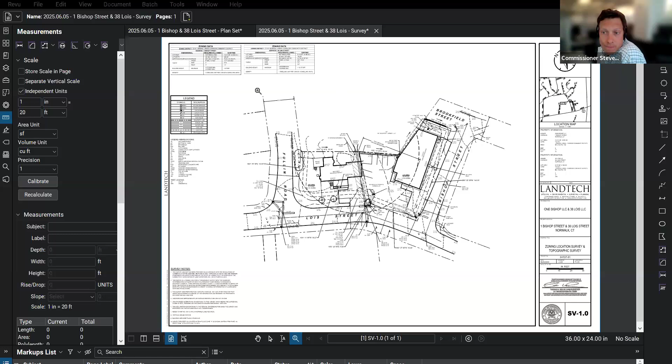Andy, can you zoom in a little bit please? Sure. Beautiful, thank you. So again, this was the commercial building that currently exists today, and this is that parking lot. This is a single family dwelling and the parking lot driveway here to access the garage.

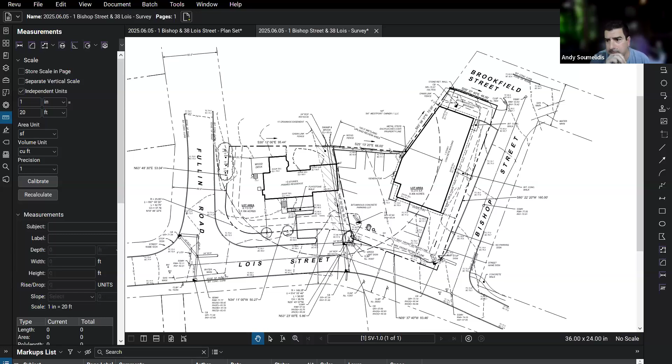Under proposed conditions, we're looking to put a new building in the general vicinity of that existing building on 1 Bishop.

This single family will be torn down also, and a new 4 townhouse residential structure would go in the vicinity of 38 Lois. These curb cuts get totally eliminated.

So right now you would enter the site here for this commercial lot and here for the residential lot. We would come in now off of Fullin Road here and access. These are garage bays underneath these townhouses. So you would get under these townhouses coming off of Fullin Road, and then you would continue on through here.

And there's additional parking underneath this building. You'll see that in the architectural a little bit later on. And there's some handicap and guest parking here as well. You'll see also from the landscape architect's plan, there are a few areas of pervious asphalt as well.

Just for the record, we didn't take that into account when designing our drainage. A lot of times we take pervious asphalt, put that into our drainage calculations, and remove that area from our underground detention systems or any type of treatment system. So that is above and beyond, not even part of our application or part of our drainage infrastructure taking credit for it.

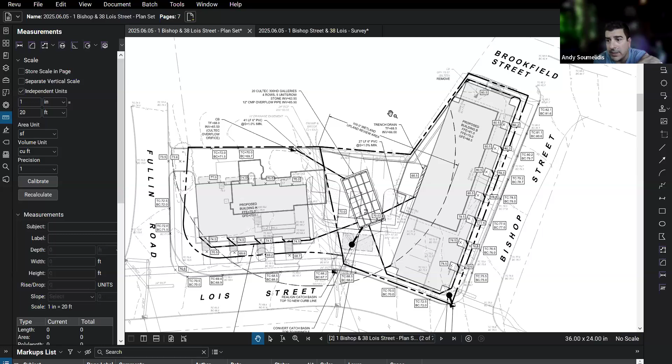Correct. Do we know the extent of the wetlands beyond the property line? So for example, if there were wetlands — well, I'll just leave it at that. So that arc might not accurately represent the extent of the upland review area, correct? So we did not, we did not flag off-site wetlands.

We typically don't flag off-site wetlands in any instance, only what's on our property. What we can put on here perhaps is the town's wetland line, which is very similar to where the limits of the brook are. I don't think it extends much on here, it might extend a little bit more into here, but it's not substantial enough to change the impacts of that 100-foot buffer. Got it, thanks.

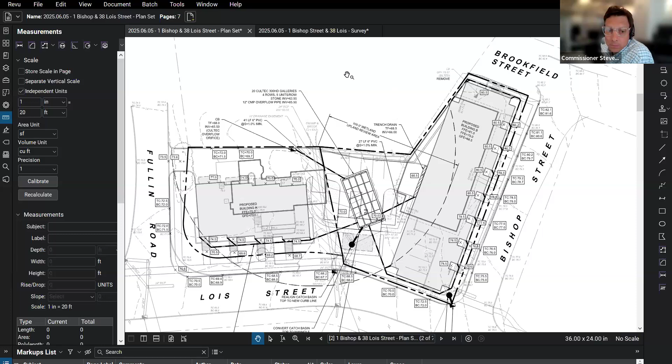We can email you the previously delineated wetland on that adjacent property. Oh, you have that. Perfect. We do from the Pepperidge Farm subdivision.

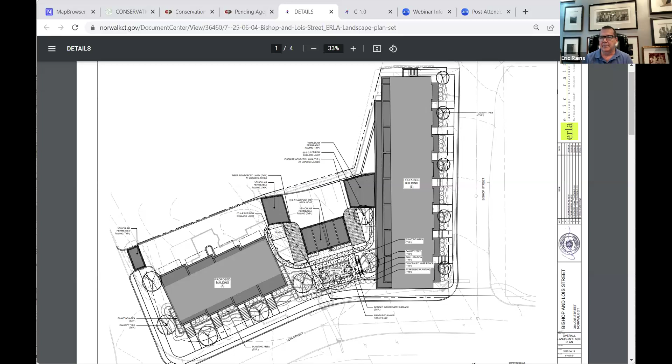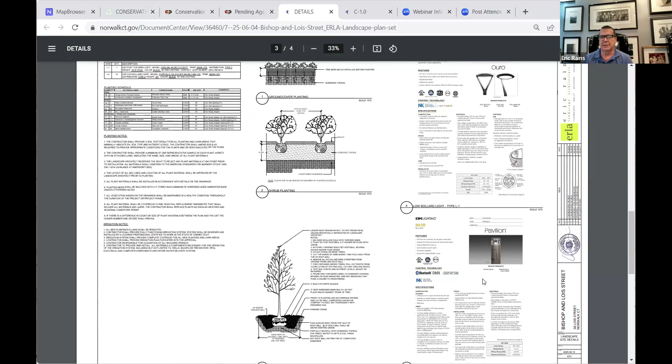If you move through the next sheet, this is the actual planting plan, with all plant materials identified and quantified. We'll get to the plant list on the back sheet. The following page shows the details of planting, with the plant schedule—a mix of deciduous trees, evergreen and deciduous shrubs, and some perennials.

May I interrupt for a second—how would you compare current landscaping conditions to the proposed? Currently, because of the use of pervious materials, I think it's an improvement to both parcels, and once combined, it'll be one. This is a much more diverse plant schedule—neither property currently has this level of plant diversity or the opportunity for groundwater recharge. So to me, it's an improvement.

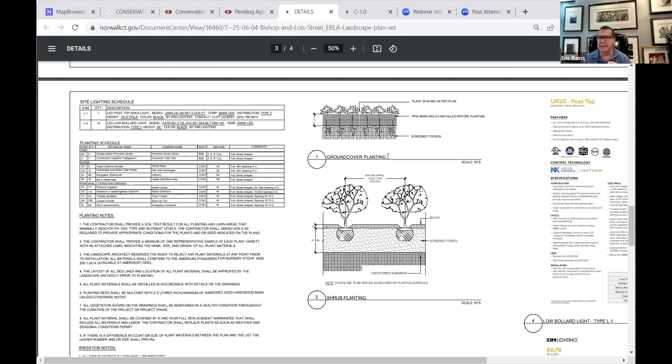Thank you. On this page, probably not so much of a concern to this group, but there's lighting shown to the right. The final page details how we plan to construct the reinforced lawn, all the different layers of gravel that go into it, which is why and how it remains permeable.

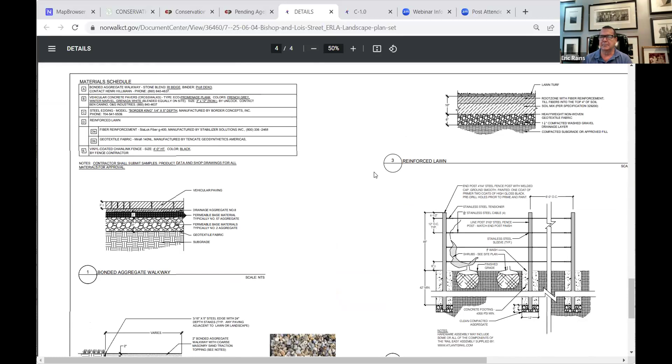If there are any questions, I'd be happy to answer them. Ms. Knight asked: is this a planted lawn, what do you mean by reinforced lawn? Yes, it's an actual lawn—what makes it reinforced is the layered aggregate detail, with different grit sizes. The top layer is where the root zone of the turf sits, with water able to pass through below, and the lower two layers serve as a reservoir until water recharges into the ground.

What is the fiber reinforcement? It's an additive mixed into the soil that locks into place when pressure is applied. The product is designed to handle emergency situations, like a truck needing to drive on it without burying down. Is it synthetic or natural material? It's synthetic.

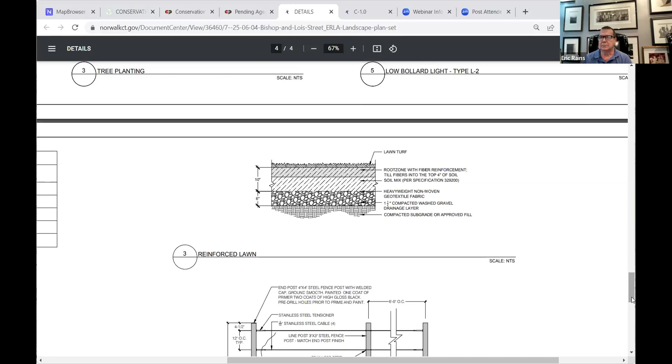Okay, any other commissioners have more questions for Mr. Rains? Ms. Knight?

Just looking at the back of the property, I think it would be helpful at some stage to have some photos, just to see what's behind there and where the wetland marking is from, before the stream is piped in. Typically we look at buffer zones, planted buffers between development and wetlands.

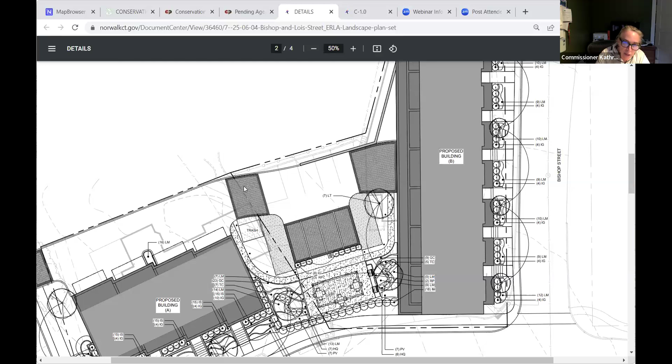The other question I had was about the parking and driveway, as to what the plan was for snow removal and where that was envisioned to be happening. There are small areas for snow removal, particularly on the vehicular driveways, but I don't know how much snow storage would actually be accommodated on the site. It would probably be one of the situations where it would have to be removed.

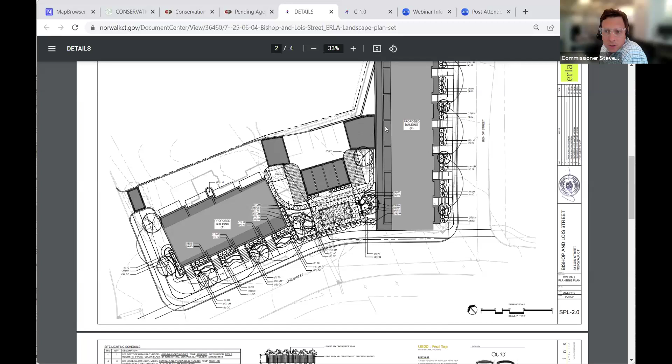It would help, Alexis, if you could maybe share some aerial photos, if you wouldn't mind.

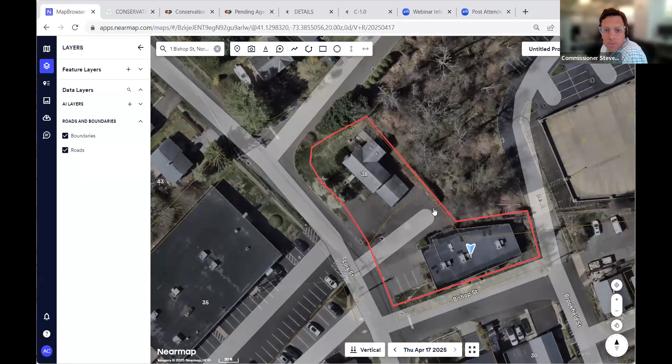Okay, so that is all just a natural area back there, for the most part. Yes, all off our site on neighboring property.

To get your bearings, here is Route 1, Westport Ave. This is where the old Pepperidge Farm factory used to be, now the 595 Westport Ave apartments. This had formerly been, or maybe still is, the Pepperidge Farm research and development site and their associated parking garage and parking lot.

This is another development that you had approved a few years ago. There is this intermittent water course that comes down to the property and ends approximately here. I'll send a copy of the wetland map. There is some associated wetlands along the water course, but from here on out it is piped and eventually goes across Westport Ave out to Indian Brook, which is a tributary to the Saugatuck River.

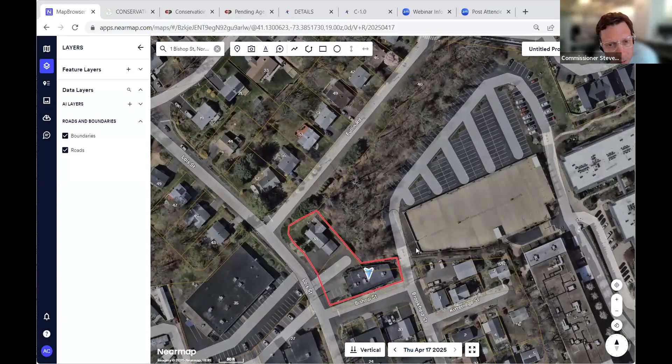Thanks, Alexis. Okay, applicant team, do you have any more that you'd like to add?

If it's your pleasure, we'd be happy to share with you the architectural plans so you have an idea of what's proposed. If that's not something you'd like to see, that's fine too. I mean, honestly, I don't know that it has bearing, being an architect, I'm not trying to be a jerk, I'm just saying, to save everybody's time. Mr. Grothier is available, but that's fine if it's not something you'd like to see. Well, Finefield does good work, I'm sure it's beautiful. They are posted on the webpage as well.

Can I circle back to the stormwater management plan just to make sure that that has been submitted to the Public Works engineering department for their review? Since you are discharging to the city pipe, they're going to be reviewing that, and I just want to make sure that they're good to go.

Well, we have not yet filed a site plan application with the Planning and Zoning Commission. Once we do, that would be one of the required referrals, not only to Public Works, but WPCA, fire, TMP, and one that I'm missing. So certainly the Department of Public Works will review the stormwater management plan, and if there are any issues or modifications necessary, they will share that with us and we'll have to respond accordingly.

And so as far as timing, when do you plan to file for that? We plan to file sooner as opposed to later, but some of it is dependent upon if there are any revisions that this commission deems appropriate that we would then want to incorporate into the plans for the site plan application. Okay, so I would go ahead, in advance of the P&Z filing, reach out to the DPW engineering department to get their approval. Sure. Okay.

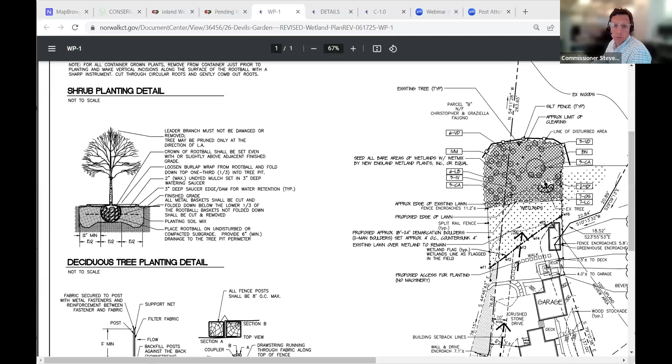Devil's Garden Road, a driveway, residence, garage. At the garage there are steps down, with a fairly good change in elevation from the higher driveway to the lower rear yard. This was the rear yard approximately here. Wetlands were delineated bisecting the previously existing yard. The area in the very rear, which is hatched, is the area of wetlands that was disturbed, and this is the activity that was cited in the order.

Additionally, there was construction of a shed greenhouse structure that is now proposed to be removed. Also, there was construction of a small deck off the garage with a hot tub. The deck is proposed now to be removed and replaced with a stone patio, and the hot tub moved over to meet the zoning setback.

Other than that, I don't think anything had changed from the previous plan, and I'll give the applicant an opportunity to add anything if they wish.

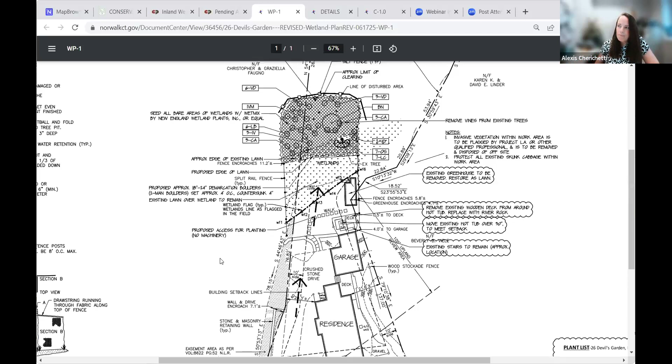Is Frank here? I'm not sure if Frank is here. Yep, Frank Murphy's here. Okay. Frank, are you going to speak or do you want me to speak? No, I'll speak.

With regard to the hot tub, it turned out that the building setback line, which didn't exist when this home was built back in 1934, and when the hot tub was placed, Ms. Shack was unaware that 14 inches of it was outside of the building setback line. So the change is to move the hot tub 30 inches to the left as you're looking at the drawing, and then replace the wooden deck with stone. It's been approved by the zoning enforcement officer.

The second thing is on the potting shed. It turns out that part of that is encroaching on the neighbor's property. So we are going to remove the potting shed, and what will remain in that area is a planted raised garden. Other than that, the plan is identical to what was previously submitted.

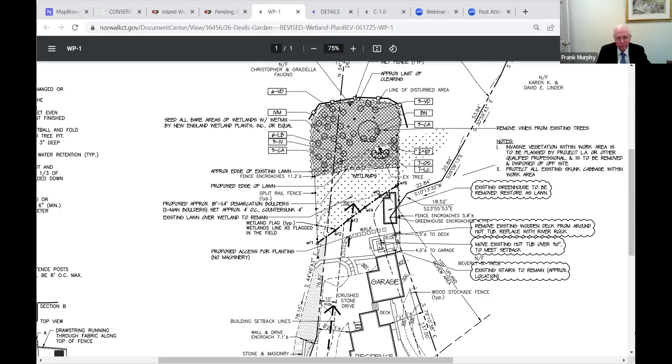Alexis, could you remind us of the process related to changing, or first of all, how the bond is calculated?

Let me just pull it up. So we have what we call our calculator. It is a spreadsheet that has costs that have been standardized. So, for example, there is a cost per shrub, per tree, per seeding, for removal of material. I don't have my calculating sheet open, but for this bond, the total came to $5,180.

The bulk of that bond is just the cost of the plants. The $3,628 is the city's estimated cost, if the property owner did not complete the corrective action, of completing the planting plan based on standard price per units in our spreadsheet. The remainder beyond the $3,628 includes the installation of silt fence and demarcation boulders, and then there's a small amount for the removal of the shed structure. Okay, that's how that's calculated.

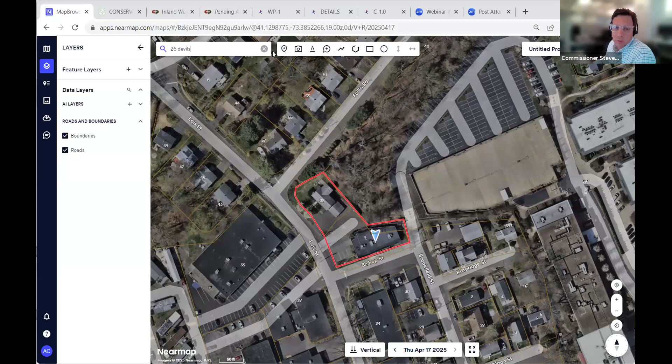So in response, I think I've seen this as a compromise, where we are not necessarily getting everything we may want, but Ms. Shack isn't either. That's how I'm seeing it, just speaking for myself.

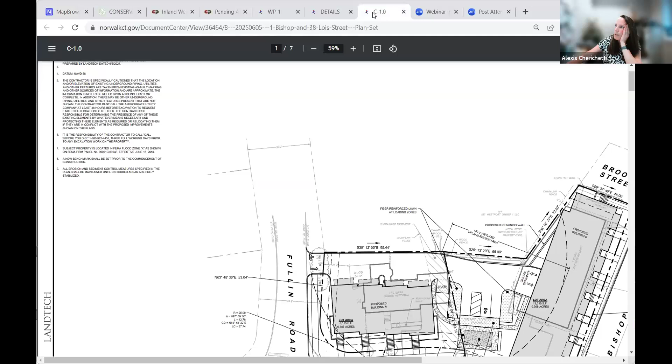I guess, Catherine, what were you thinking? What would you be more comfortable with?

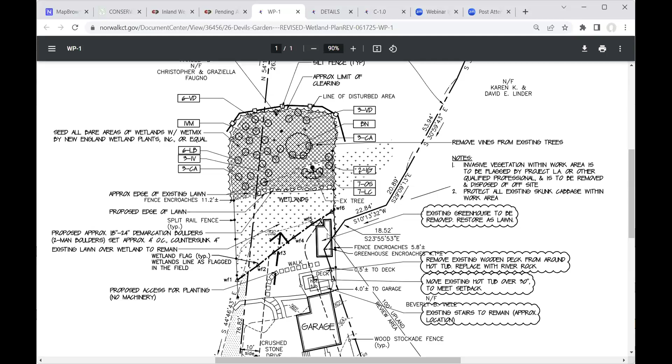I would be more comfortable with, in the planting plan, either just in front of the boulders or just behind the boulders, to have a little bit more conscious plantings that would act for better filtration of additives and runoff from the lawn.

If I may, I'd like to point out that the area of the lawn within the wetlands is very small, as shown on the plan. Second, this house was built in 1934 or thereabouts. The lawn is exactly as it existed when my client purchased the property in 2015, and from aerial photographs, it appears the lawn area has existed in that small portion of the wetlands for a very long time, perhaps as long as from 1934.

Our soil scientist didn't see any issue with the lawn, and had recommended that the existing lawn area remain intact as it is. There's been no showing of harm or claim of harm of any kind to the wetlands. The total wetland area is 6.4 acres, and this is just a small tip of it that's being affected, if at all. So we think the homeowner shouldn't be required to take up the lawn.

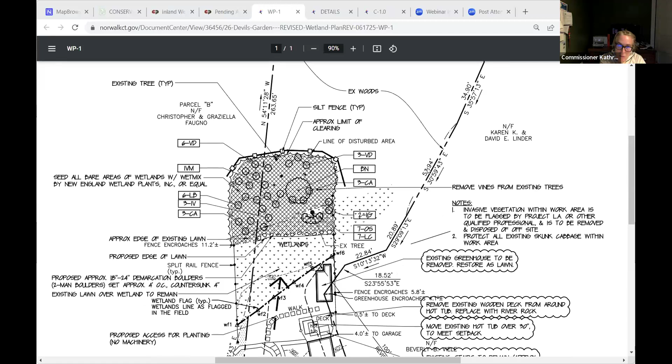Okay, so we've got 6 VDs, 6 LBs, right, so you have a total of—it's in the staff report, I believe. So many things open.

Commissioner Clocky asks if he can pose a question to Ms. Knight: would it be feasible or acceptable to her if there were a line of shrubs behind the boulders—say a 3-foot line across there—using the ones already proposed, just moved to create a plant line, if that would satisfy what she's looking for.

She responds that it's not just her preference but the whole commission's concern, looking at what from a root infiltration standpoint would provide the best result.

The chair notes they have three commissioners who've been quiet and says either they put it to a vote now, or those commissioners can chime in with their thoughts, since they need to keep things moving.

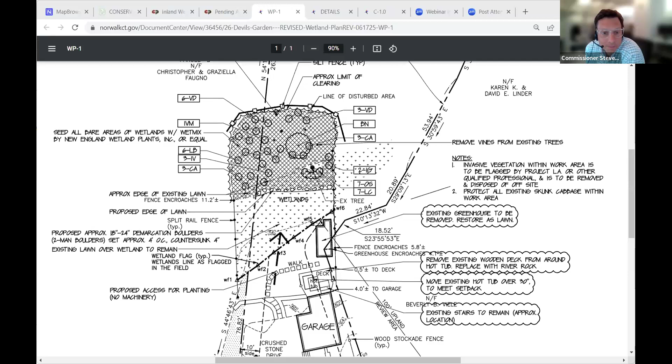Ms. Knight says there are two shrubs already relatively close, and suggests that if there were three additional shrubs—or without adding any—maybe five of the shrubs could be used instead.

She confirms there's a total of 27 shrubs proposed across the two properties. The chair suggests leaving it up to the applicant but requiring a minimum of five shrubs be planted parallel to the demarcation boulder row, asking whether behind or in front, and specifying within 5 feet.

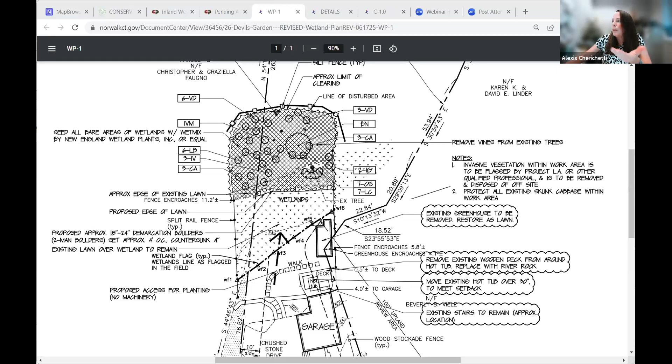Someone asks why not put them at the edge of the lawn, and suggests they ought to specify the kind of shrub, since it's unclear whether the shrubs proposed meet the criteria for the sponge effect or not.

Another commissioner says they'd have to ask the landscape architect about that, but thinks they're all fine.

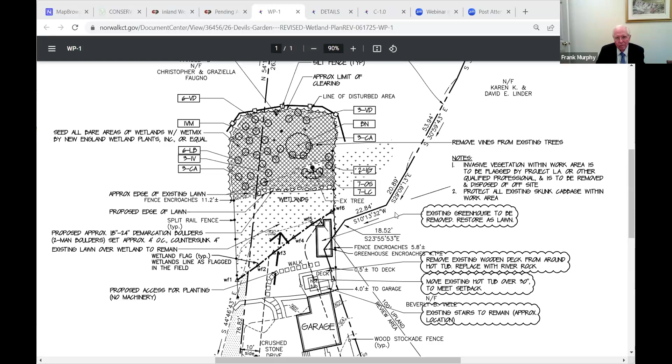Lynn is asked where she wants the shrubs placed, in front or behind the boulder. She says behind is fine, within 5 feet, just to buffer that area—behind that is where everything else is, like the plants speckled in the plant mix and the wetland mix.

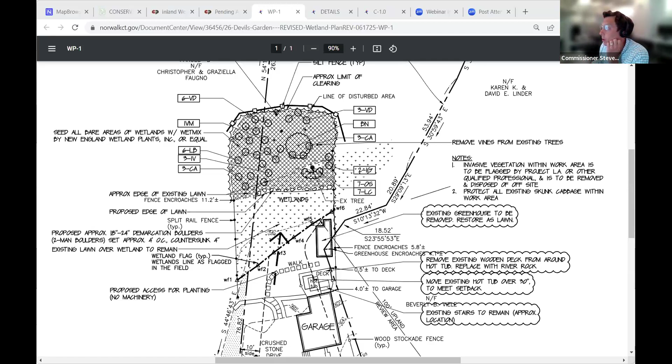The chair moves to adopt the memorandum dated July 7th for S25-654 with two edits: first, a reduction of the bond by $600 to give the benefit of the doubt for removal of the structure—not quite a greenhouse—over the planting bed; second, to alter the planting plan to place at least 5 shrubs parallel to the boulder demarcation, within 5 feet of the boulders on the side away from the lawn, with no additional plants, just rejiggering a couple of them.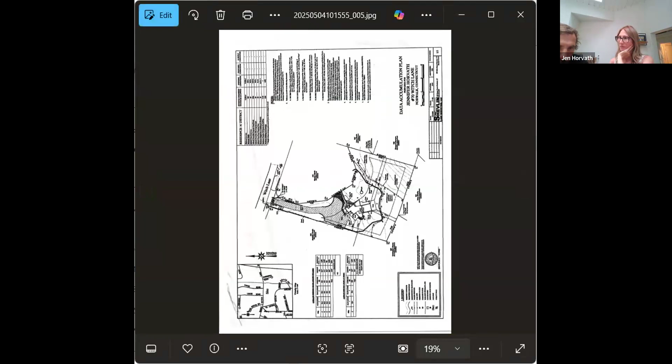But that's pretty much the basic bridge we're going to use. And how did you guys propose to actually get this 12 by 12 shed built back there? Oh, we're probably going to just buy a kit and put it together ourselves.

So hand carry everything back there? Yes. Okay, and foundation wise, what are you thinking? I was thinking of just using unfooted pier blocks. So it's a wood frame structure that's going to be a few inches above the ground. Probably have gravel underneath it, put the pier blocks, and then when I build the floor, I'd like to just put a moisture barrier.

Did you have plans for any gutters or anything like that? No, just let it drip onto the ground. Okay, how far, remind us if you could, Alexis, can you zoom in on that and remind us how far this shed is from the wetland line?

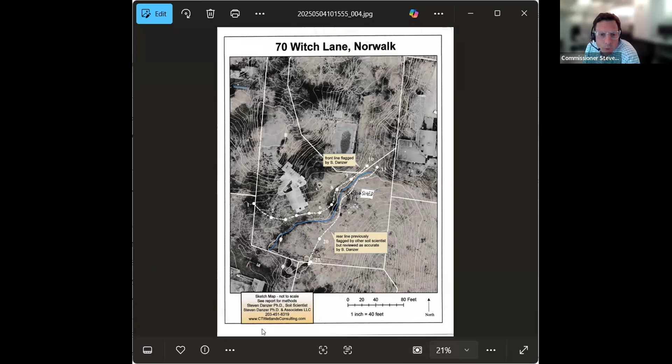Please. Oh, we got the X-ray version of the aerials here. So this is the approximate location of the shed. And then I actually don't know if this is, oh, here's a scale.

Maybe a little less than that. So this is the scale. Probably more like 15 feet is what it looks like, I'd say 18 feet. We had measured, and I believe that's where the 30 feet came from. I wrote that in, but we did actually measure it. So maybe the shed is just drawn in the wrong location here. You didn't get the scale out to draw it perfectly.

Okay, and those are 1 foot topo lines? These are, yes. Okay, so it's about a 1 in 15 pitch. Was that 7% grade? Right. I think where the intended location was, the relatively flatter spot here.

Okay, so I think that pretty much helps me wrap my head around it. Other commissioners, do you have specific questions you'd like them to answer? I have a question. What is the process that you would go through to make sure that the shed was approximately 30 feet from the wetland?